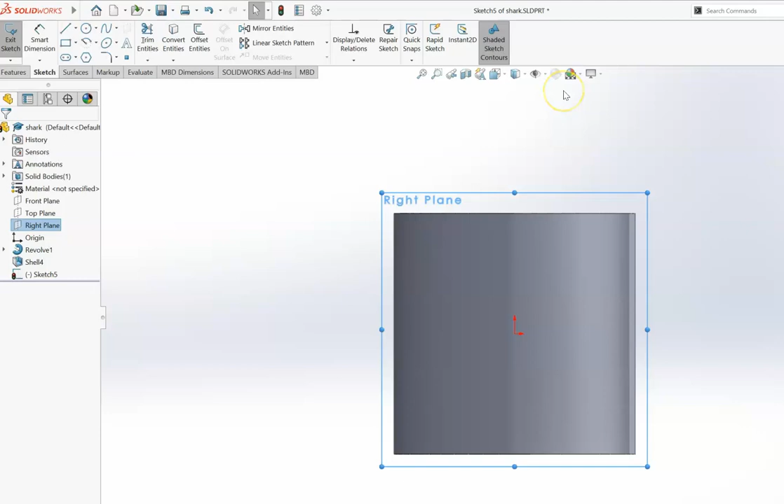Okay, this video is going to show how to do an extrude cut, but a strange one. Generally, we've done rectangles or curves up to now, and I want to show you something a little bit more difficult so that you can use your imagination for how you might do the thing that you want to do.

So right now, I want to show you that I have a cylindrical pot. See that? And I'm going to cut out a strange shape out of the top so that it looks a bit more like a shark mouth.

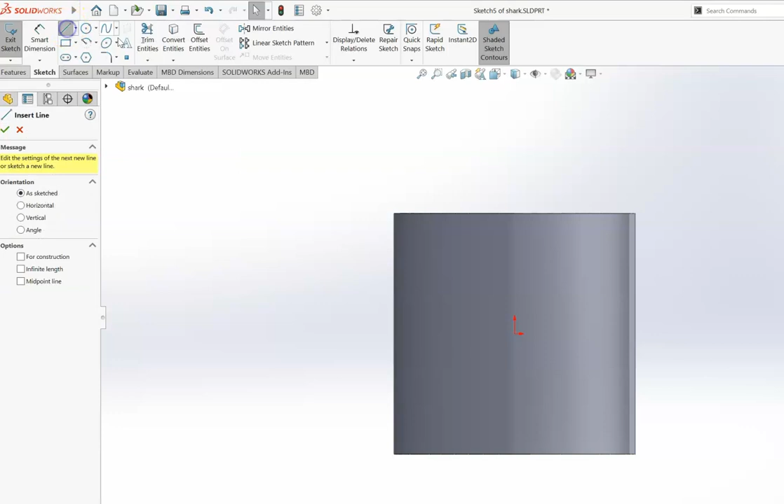Okay, so the first thing I'm going to do, I need a sketch, and I'm going to just draw some lines. Now I want to draw a line. I want to cut this out, so I want to make sure it's going to be above the top of the pot when I cut it. So I'm just going to draw. It doesn't matter what the measurements of that shape is, so long as it starts at the top of the pot and then goes out bigger and above the pot.

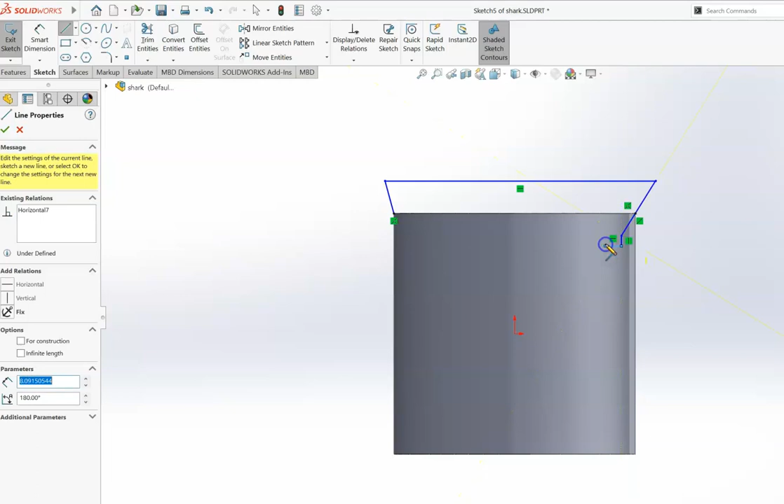And now I'm going to do my shape. Shark mouth is like lots of teeth, so I'm just going to draw a lot of teeth. You want to be careful if you're actually doing shark teeth, to make sure that you don't make it too sharp, because when planting your pot, you don't want to get hurt.

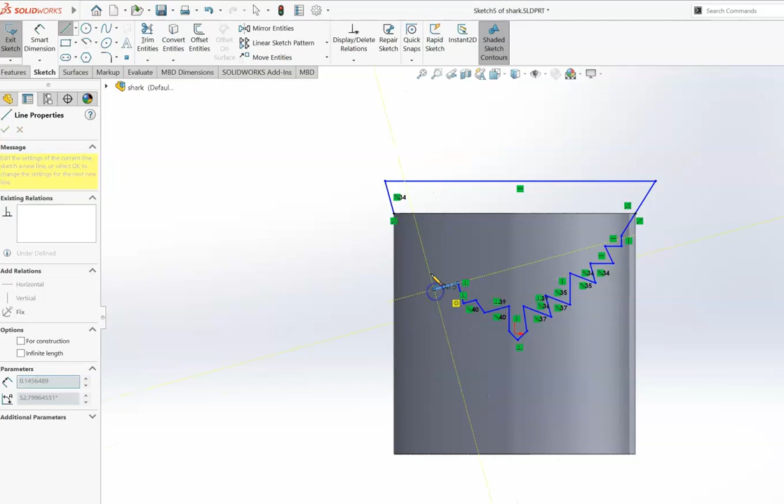So go back up the other side. I'm going to go slightly lower for this second set of teeth, and of course you're going to do a better job than me. But there we go, that's probably to the edge. See how it's orange? That means that it's lined up with the edge.

And then I just want to join that up to the beginning. It has to be joined so that it gets this shaded look. The shaded look tells me that my drawing is complete.

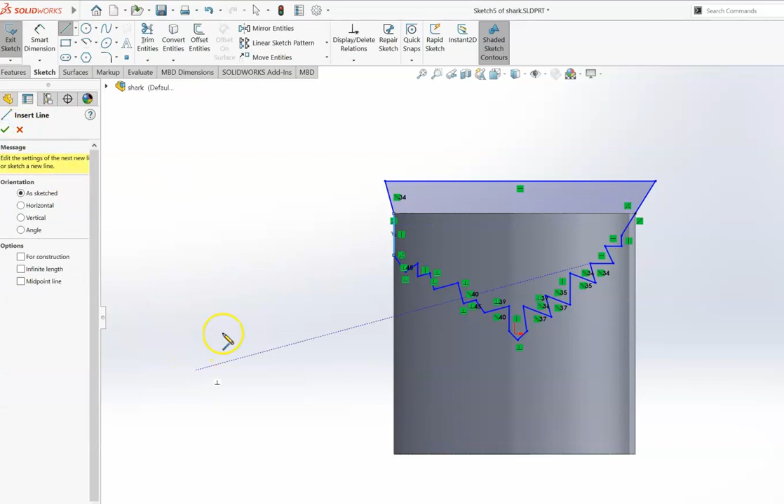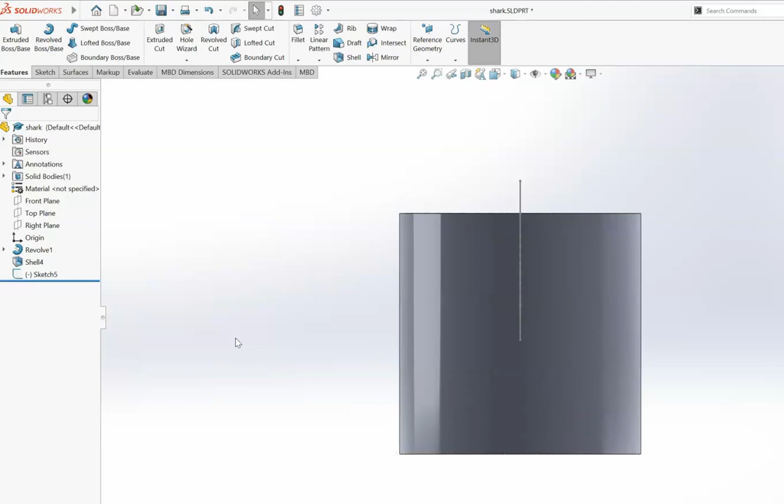Once I click that, you can see that exit sketch, and we'll have a look - that's just in the center of the pot. Can you see that? It's in the center of the pot. It can be on either side, but wherever your plane is probably where it's going to end up. So my plane was going through the center of my pot, like that.

Okay, so now I want to cut this. So I'm going to highlight the sketch, and then I'm going to go extrude cut. Okay, that didn't work properly, so click the sketch there. And now it's saying, do you want me to just cut 1 centimeter? I don't want you to just cut 1 centimeter.

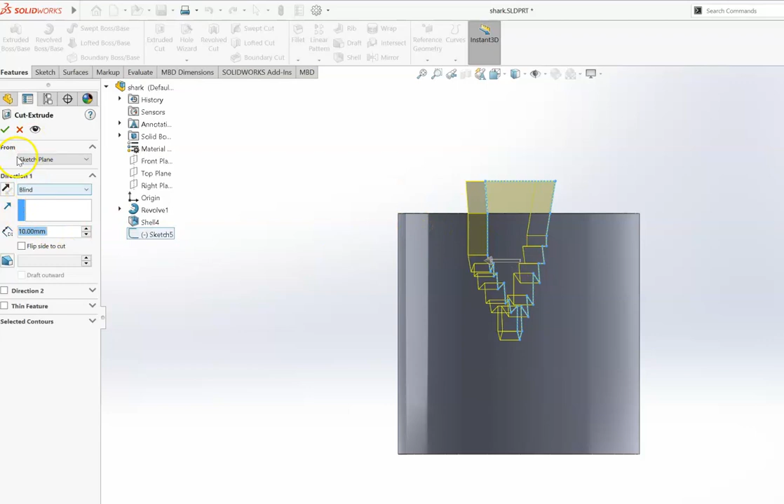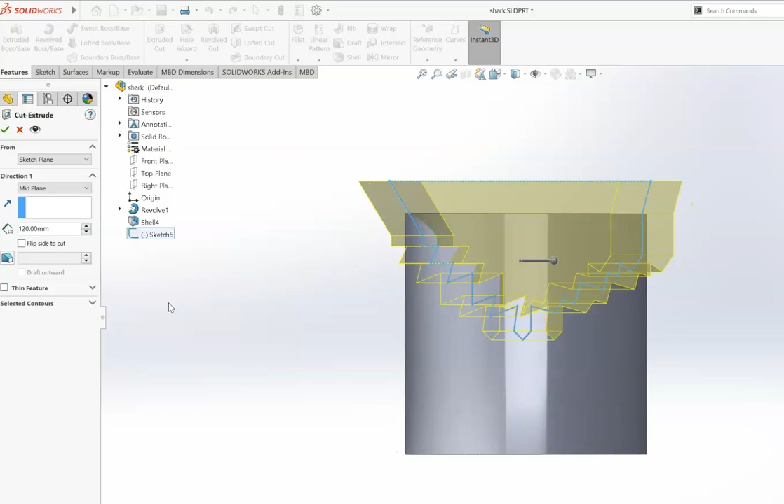And I also don't want to just cut one direction. Because mine's in the center, I'm going to click this thing that says mid-plane, which means cut in both directions at once. And then I'm just going to make it bigger than the pot. It doesn't actually matter so long as it's bigger than the pot itself, so that when the cut happens, it happens on both sides. And I'm watching the preview now to see if the shape is about what I expected, and it's about what I expected.

Okay, and so now I'm going to click tick, and there is my shark pot, all ready for some eyes and nose on it. Your teeth will be straighter than mine. This shark is in desperate need of some dental work.